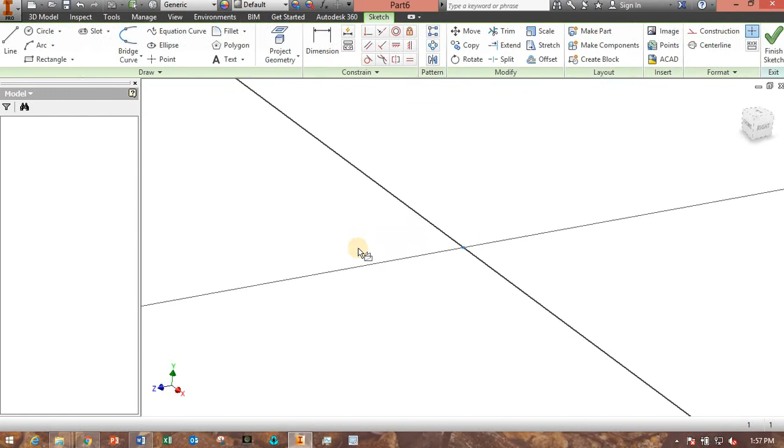So they cannot do this spoke because that spoke is not a straight extrusion. It's a curved spoke. So this is why we need to use sweep. All right. So let me show you how to do that. The first thing I'm going to start out with is drawing the hub. So let's start a new part. Make sure it's a millimeter part. And let's create a sketch on this base plane so that we can create the hub to be 80 millimeters.

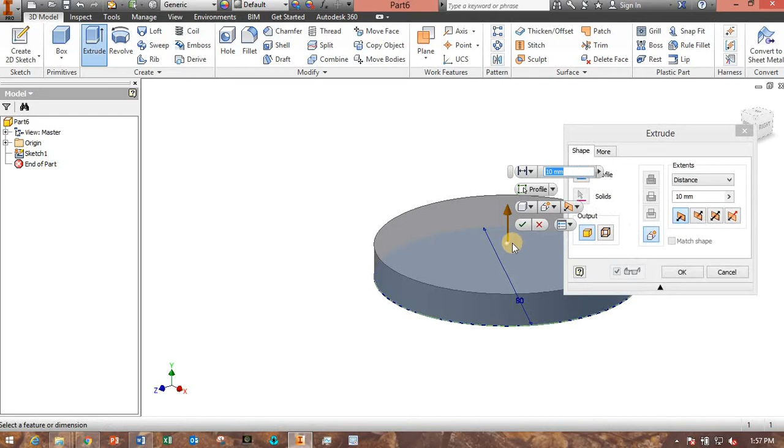Okay. Now I'm not going to draw the hole right now, and you should not either, and I'll show you why in a little bit here. So just start with the base circle here. So let's extrude that up a distance of 50. Okay. Before I go any further, it's a good practice to save it early on. This will be lab 4. Okay. Make sure you save your work early on. All right. So I have this.

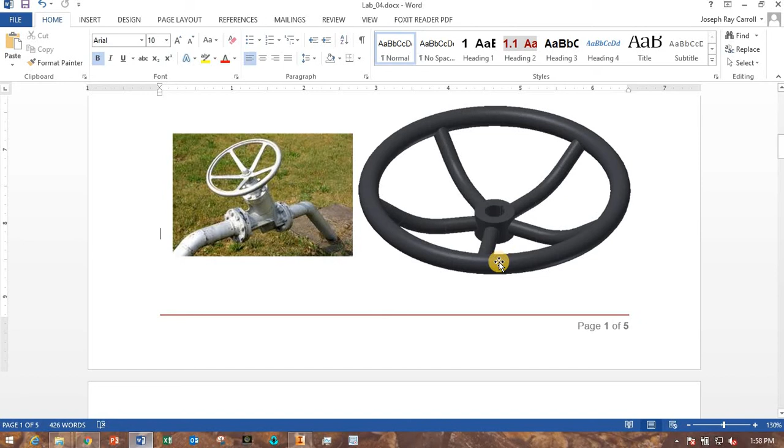Now, I told you I did not want you to at first make this hole here that's in the center of the hub. Now, to demonstrate why I don't want you to make it, I'm going to make it, and then I'll show you the problems that creates later on. So at this point, if you're following me, do not create this hole right now. Just watch me do it now, and then we'll create it later. Okay?

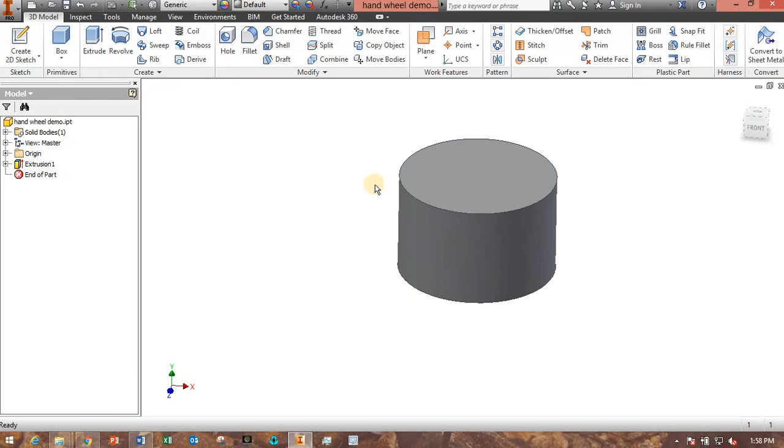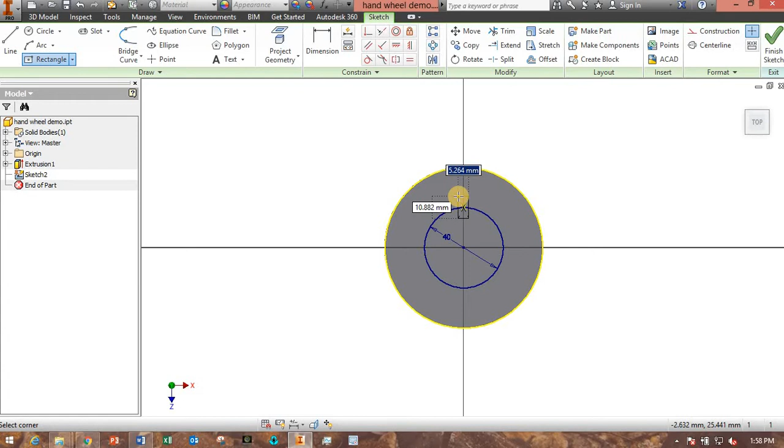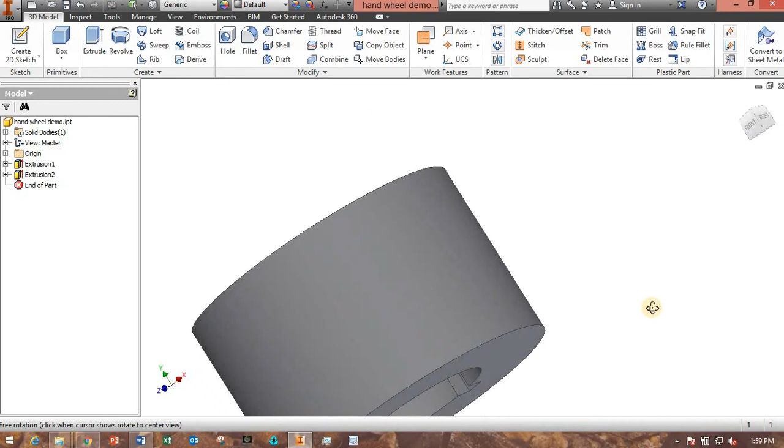Alright, so I would create a hole with a diameter of 40, and let's use the center point rectangle to make this keyway here. Alright. Okay, so if you did make the hole at first, this is what it would look like, and then I'll show you here in a second why we don't want that.

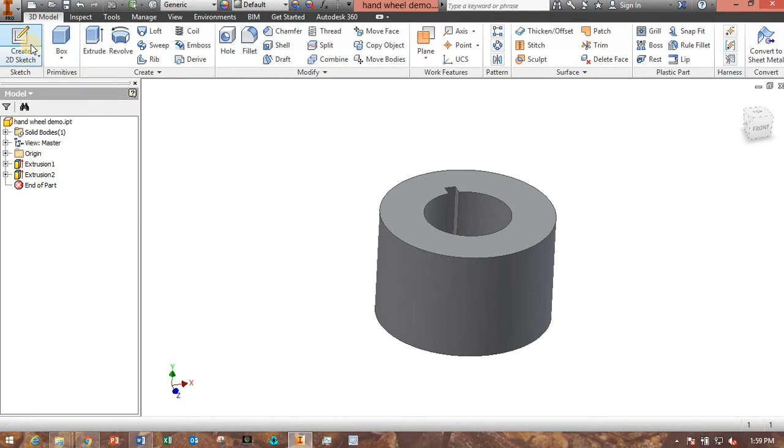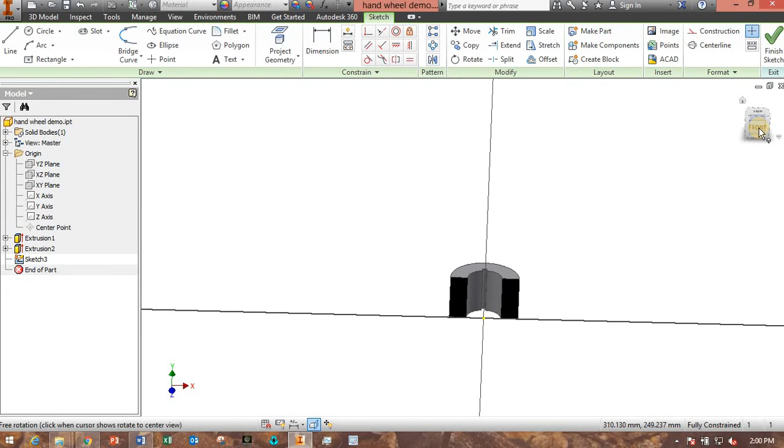Okay, so let's create a sketch. Make it on a plane like this. Okay, now I'm going to click on slice graphics here. So you can see what that does. It makes it so I'm just looking at the plane that I'm drawing on. Okay, alright, now I'm going to use what's called project geometry here, but before I do it, let me show you the reason why I want to do that.

So the height of this hub here is 50 millimeters, and the sweep path will start right in the middle of it. I could dimension the line to be 25 millimeters down from the top, but that would not capture my design intent. The design intent says that the sweep path will always start in the middle of this hub, so if it's 100 millimeter height here, then it should start a distance of 50 millimeters down from the top. So I'm going to create a line that goes from the bottom to the top, so I can start my sweep path in the middle of that line.

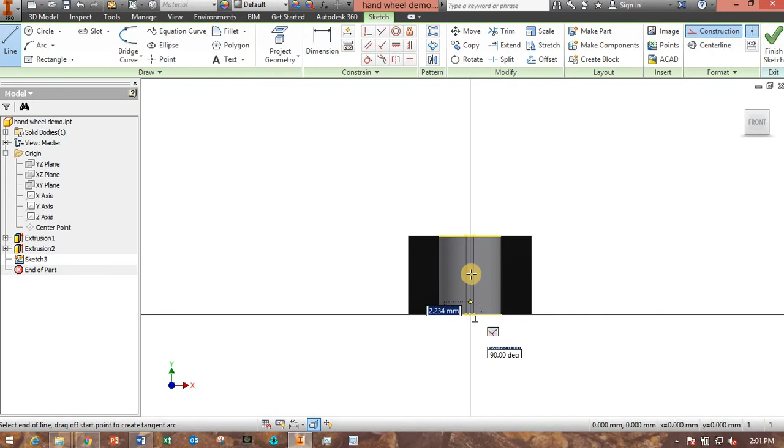Okay, so first I want to project geometry, and I'll show you what that does here. I'm going to project this line and this line into the geometry. Notice they turned yellow for me. Okay, now I'm going to create a construction line that starts here and goes up to this line here. Okay, so the important thing about that is now I have a line that is tied to the bottom and the top, so when I start my sweep path, I can start it at the midpoint of that line. So I know it's always in the middle.

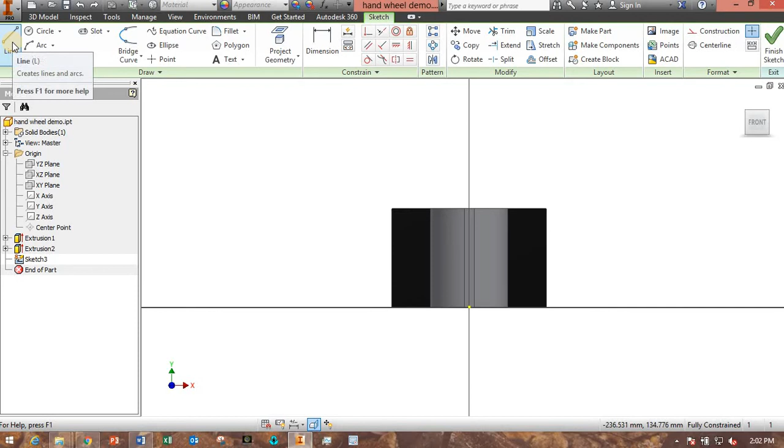Okay, now you say, well, why did you use project geometry? Let me back up here and show you why I had to do that. If I click on the line tool, let's make it a construction line. I would start here.

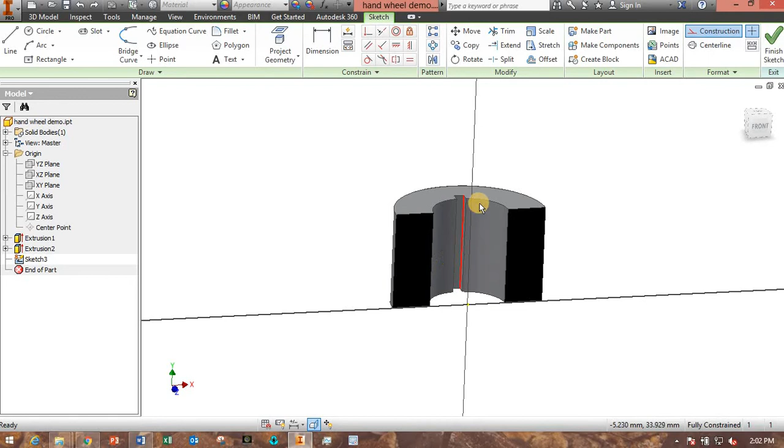Now if I drag up, I want it to snap at this edge here, but notice it's not snapping, meaning that yellow dot there that shows my cursor doesn't snap to this edge. It doesn't know where that edge is. Okay? And so in order for this sketch to know where that top edge is, I basically tell it, hey, go get this edge and bring it into the sketch.

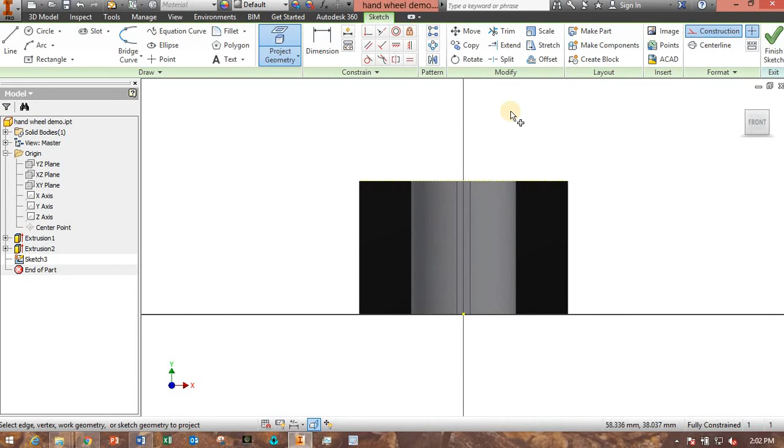Okay, so that's all project geometry does. Project geometry says, hey, let's take this geometry and let's project it or bring it into the sketch. And notice that yellow line that appeared. Now that that yellow line is there, watch the difference. Now when I click on this line, I go from here, notice it snaps green. The green means it's right on top of that edge. So that's why I needed to use project geometry.

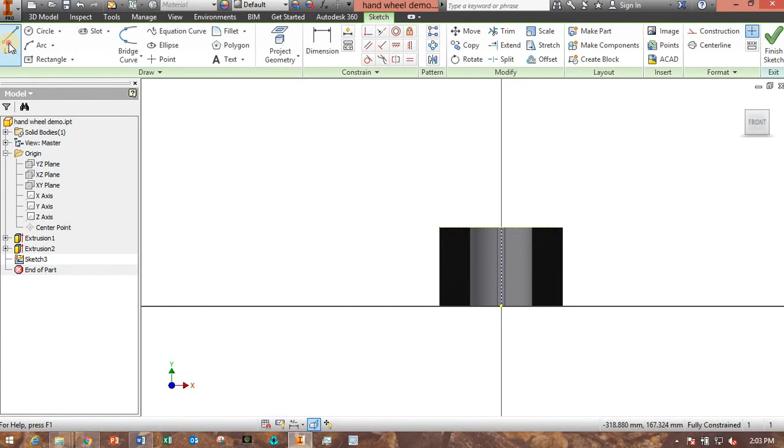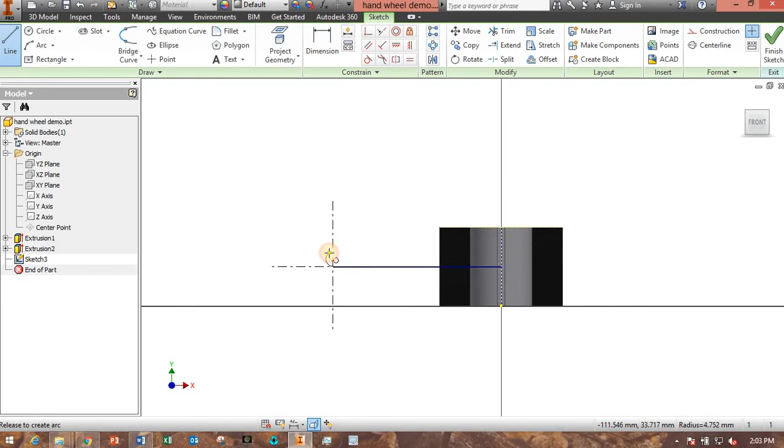Alright, so now let's draw the sweep profile. Let's start with a line and make sure it's on the midpoint here. Let's first come horizontal. Now I click and let go. Now with my cursor still on the end, I'm going to click and hold this time, and if I click and hold and drag, notice it's creating a curve. I'm still holding my mouse down, and notice the tangent constraint that has appeared here. The tangent constraint.

So now if I let go, there's a curve, and then I can continue out here. Notice this is not tangent. If I keep bringing it up, the tangent constraint will snap. There it is. And I can click again, and now click escape. So there is the sweep path right there.

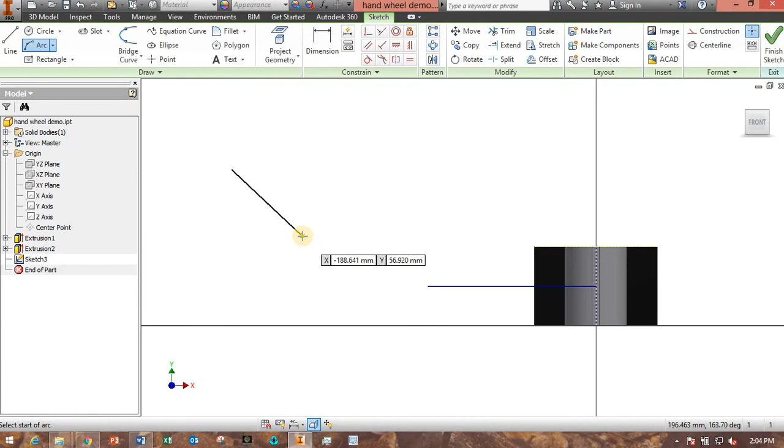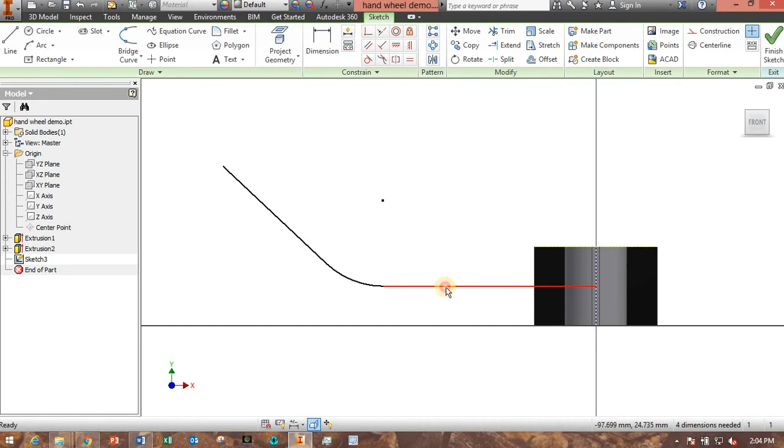Another way to do it, let's say you're not able to get this curved piece like this. Well, you just draw two lines, and then you can use an arc like this. With this arc, I can select the start, the end, and some midpoint. Now I'm going to do it not correct at first. There's an arc. Notice this is not tangent here. Well, I can fix that by using the tangent constraint, and I can do the same thing here. Alright, so there's a straight section, a curved section, and then a straight section.

So let's now go add your dimensions to this sweep path to define it. I'll leave you to do that. Here's the straight section from this tip to here.

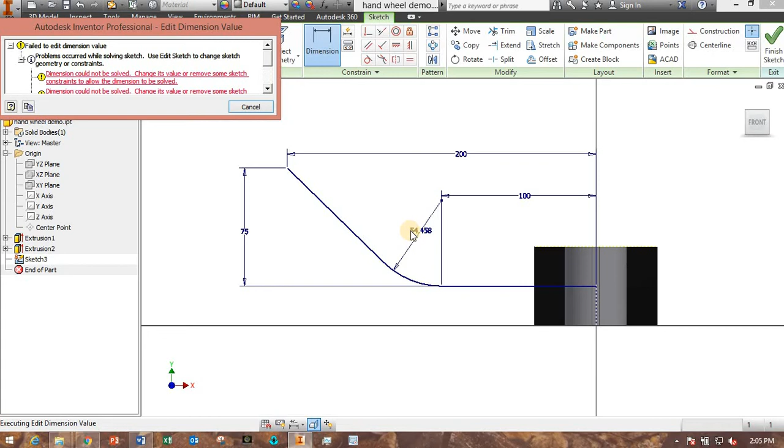Okay, obviously it didn't like something here. I tried to add in this radius dimension, and it didn't like this radius. Let's try to figure out why. Maybe I've added a dimension that conflicts with this. Let's delete this dimension. Wonder if I can drag this. Let's change this to be 150. That's no problem. I've got the 75, the 200. So notice that error came up; that means the sketch was over constrained.

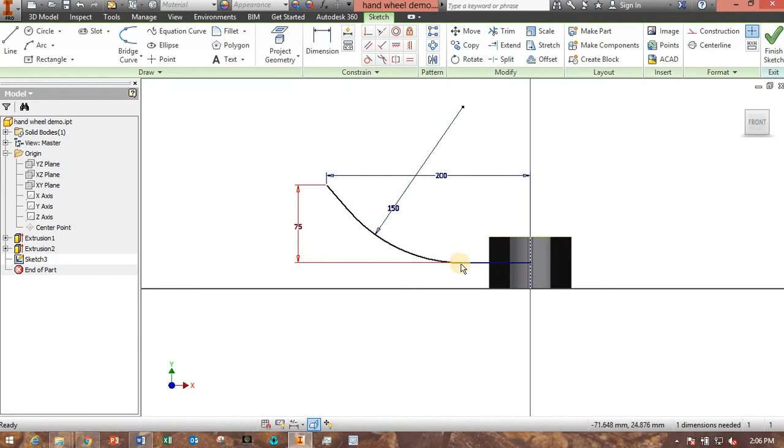Let's now try to add in this 100. Okay, it's not working. I see why it's not working, because I've defined this as 200. What if I make this 250? Okay, that's 250. Now let's try this. Okay, now that works. So notice I had the error there.

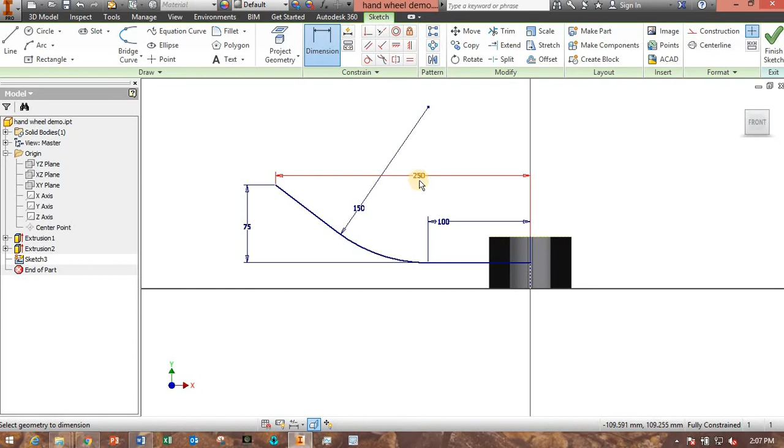That error: I had accidentally defined this 250 as 200, which was impossible for this to be 75, this to be 100, this to be 150. It was impossible for those three to be defined that way and this to be 200. So there we go, this is 250. So now we're okay there. All right, so let's finish that sketch.

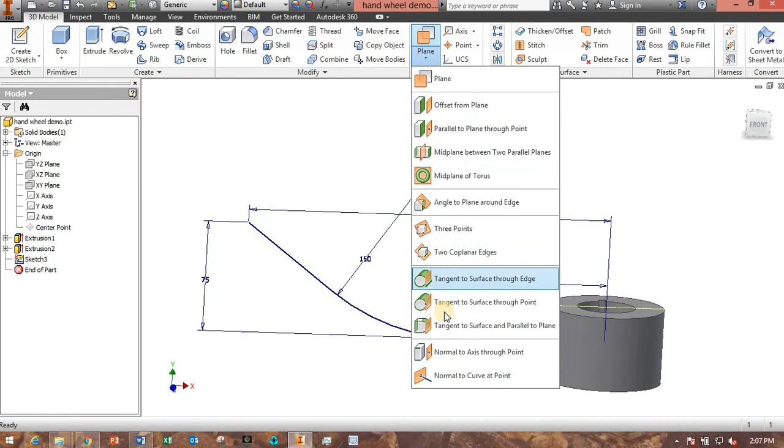So now I have the sweep path, and now I want to make the sweep profile. That profile is going to be perpendicular to this path. So let's create a plane that's perpendicular to this line that goes through this point. Let's go back to my work planes. The way to do that is down here. Select this axis and now select this point, and there's a work plane that's perpendicular to this line. Now I can start a sketch on this, and I can draw a circle of diameter 30.

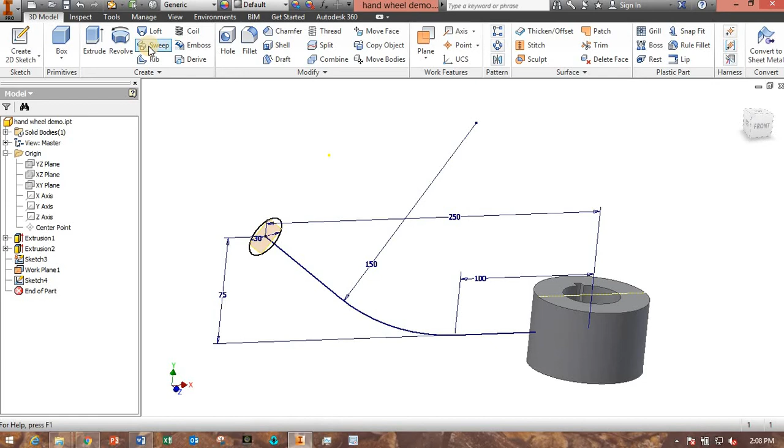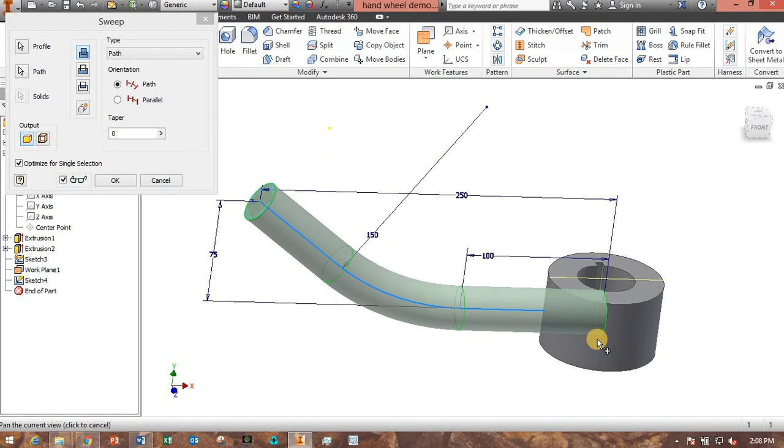And now here's what the sweep does. Here's my path, here's my profile. So here's sweep. It's automatically selected the profile. The profile is that circle. Now the path is this path. And notice what it does there. It sweeps that profile along that path. And now I click OK. And there's one.

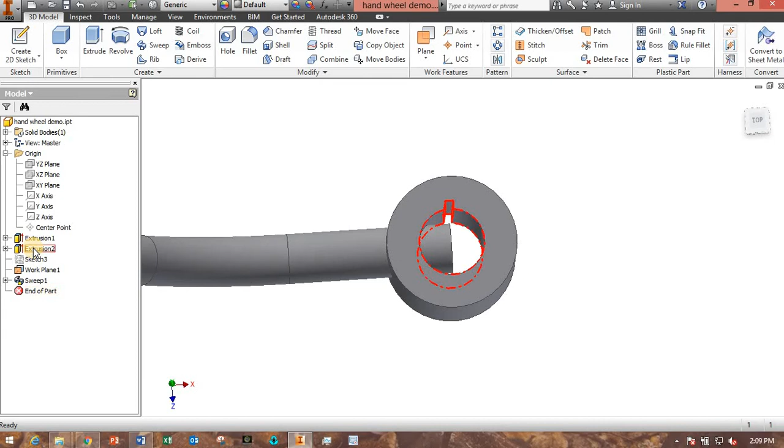Now remember, I said do not create the hole at the beginning. I'll show you why, because now if I look here, that's not good, right? The spoke goes into the hole right here. So this is why we don't want to create the hole at the beginning. If we create the hole at the very last step, then it would cut through this part of the spoke. So let's take away this hole that I've made. That was done with this extrusion, so I can right click and delete that, and now it's gone. Now there's one spoke.

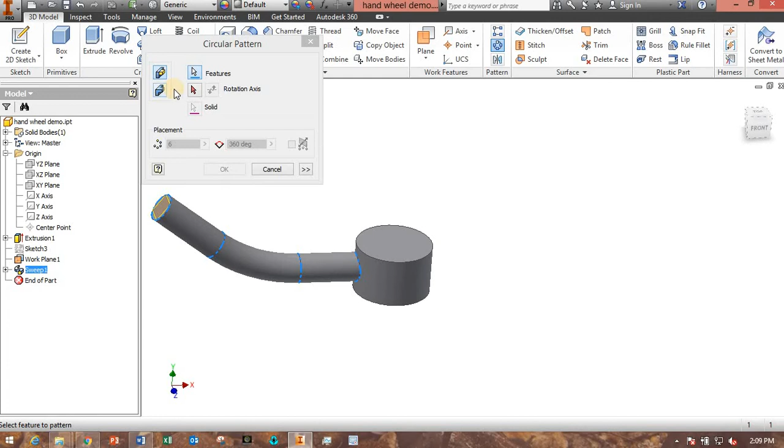To get the other four, we just need to pattern that. So let's do a circular pattern of that sweep, and let's use the rotation axis of this. And how many spokes are there?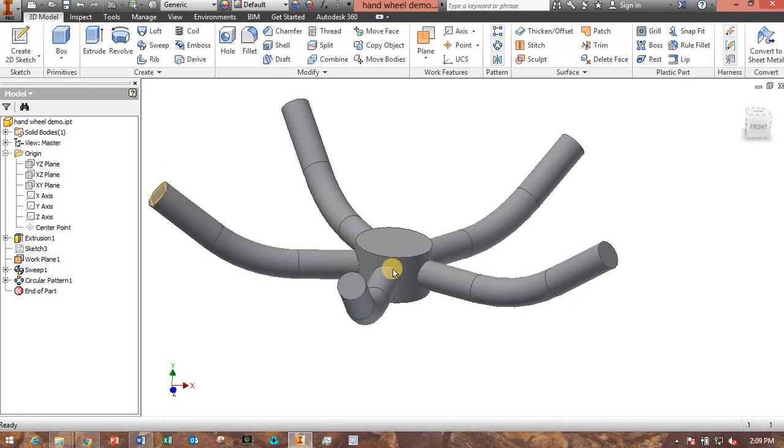There's 5. There you go. So there's 5 spokes. Now I need to get the hand wheel that connects the ends of all these spokes here. Okay. Well, that can be done with a revolution. So let me show you.

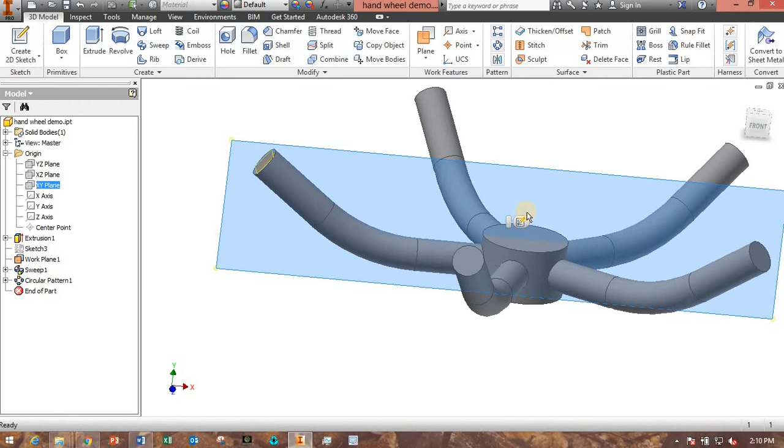Here, I want to create a sketch. Which plane is that? No, that's the bottom plane, not that plane. Okay, we want a plane like this. So if I create a sketch on this plane, and then I draw a circle here and revolve that circle, then I'll have the hand wheel. Simple enough. Now, watch this.

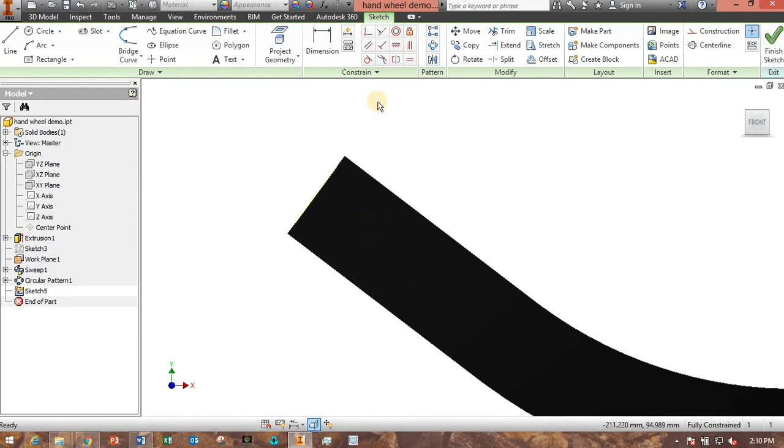Here, let's slice the graphics. Okay, so again, I'm only looking at the plane that I'm sketching on. Okay, if I click on circle and I want to try to draw a circle that is right here on this edge, is it snapping? No, it's not snapping. My yellow cursor is not turning green.

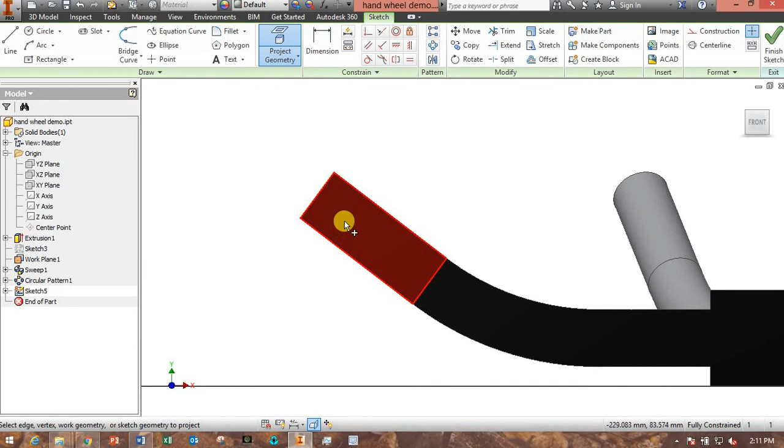Okay, so this is where we would want to use project geometry, meaning I would bring the geometry of the spoke into the sketch so that then the spoke is always connected to the sketch. Okay, now, so if I was doing it correctly, I would click on project geometry and click the spoke here, and now it snaps green, you see that, and I can draw this circle.

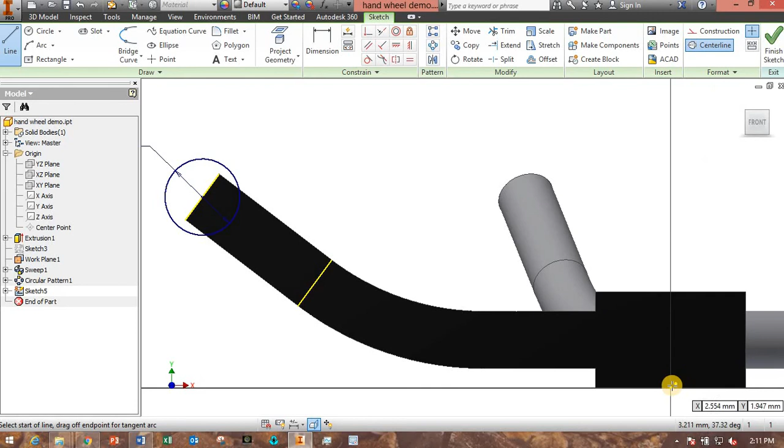Okay, so again, you can add a dimension to that, dimension of 40. Okay, now I'm going to revolve this around the center, so let's make a center line. Now let's do a revolution. There it is. Okay, now I could go back and draw the hole here. But let me show you why it was really important to connect them.

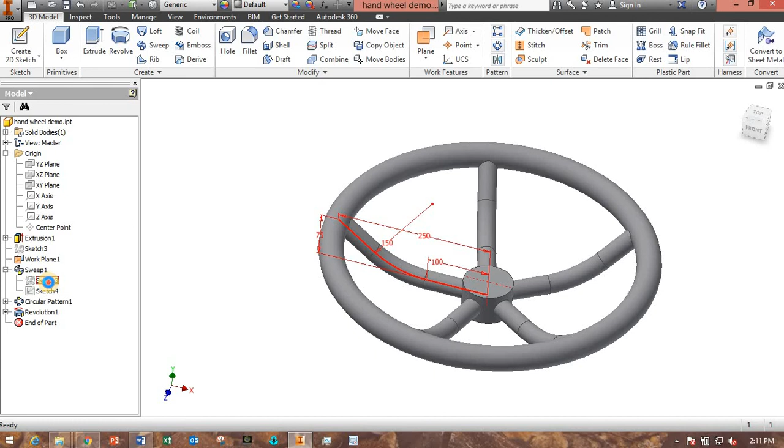Okay, let's say if I have a design change in the part and I want to make this hand wheel a larger diameter. Well, I would do that by changing this sketch here where I defined the sweep profile. Look here, what if I change this? Let's make it 300. Okay. Well, look what happens. The wheel still stays attached. If I did not use project geometry, the wheel would not have stayed attached.

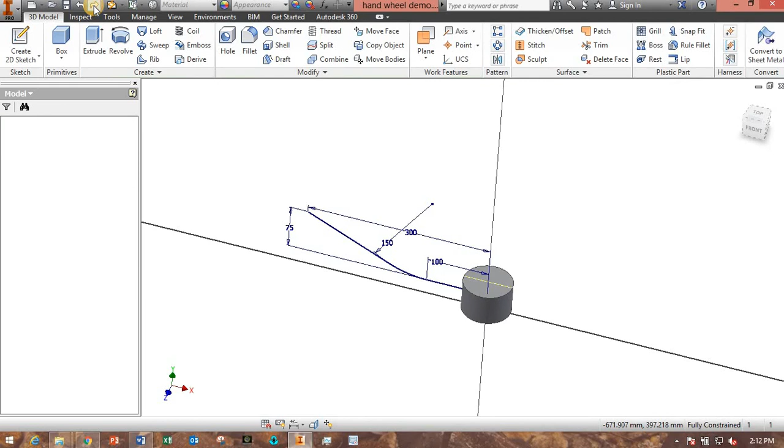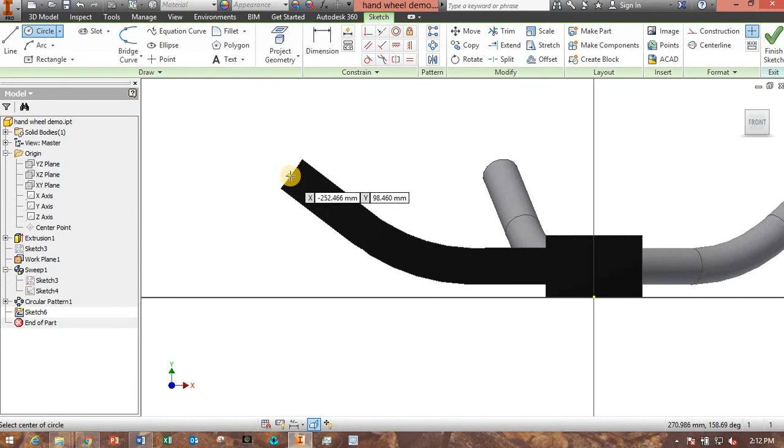So let me show you that. So let's undo here. All right. Let's delete this revolution. Okay. So let's say I sketched on this plane. So this is slice the graphics just like I was doing before, and I do not use project geometry. All I do is I say, oh, let's just draw it right there. That looks close, right? Let's make that a dimension of 40.

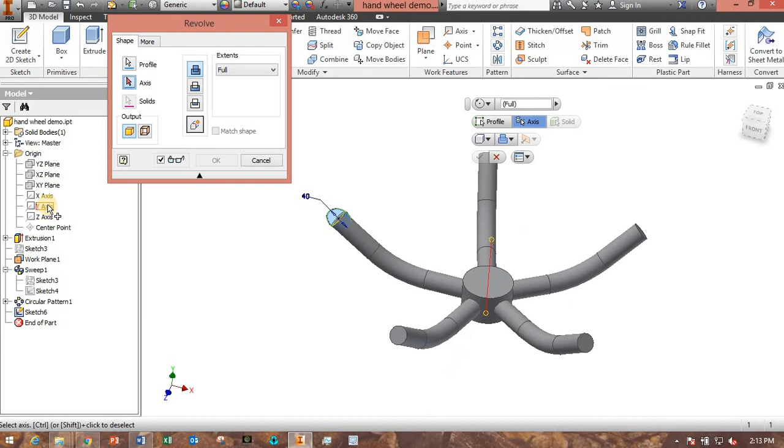Okay, let's drag this to be right there. You say, okay, that's nice. It looks on the end. I can finish this sketch. I can revolve this profile around. I forgot to make an axis here. That's okay. Notice, look here, I didn't make an axis, but I can go select an axis here. Which axis here is vertical? There you go, that axis. Okay, so there it is.

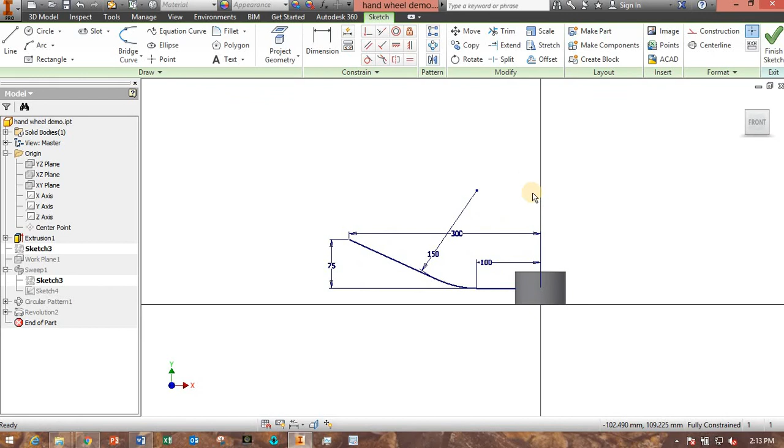You say, oh, that looks fine. What's wrong with that? Well, here's what's wrong with that. If I have a design change and I want to make the wheel bigger, I can edit this. Now let's make this 300. Finish the sketch. Oh well, that only changed the spoke. The spoke was not connected to the wheel, so the wheel stayed that same diameter. Okay, and that's not good.

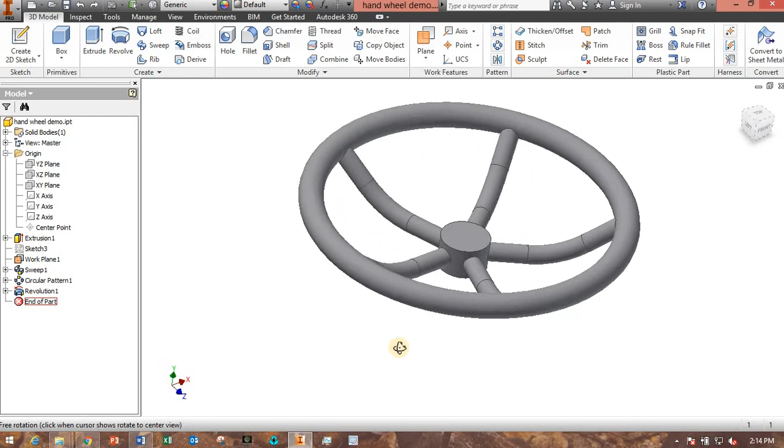So that's why we need to use project geometry so that we link these spokes with this handle here. Okay. So I can back up there. Okay, there we are. So that's why project geometry is extremely important. Now the last thing, if I make the hole now here at the end, well, then it will cut through the spokes and I won't have a problem here anymore.

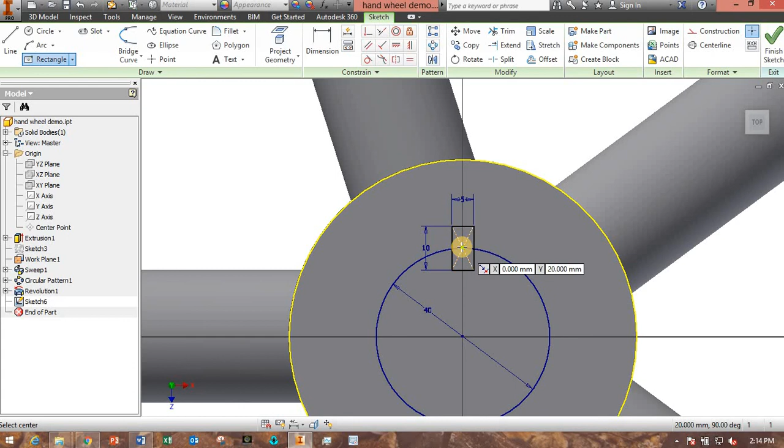Okay, so there's that. Notice I'm using a center rectangle with a width of 5. Now, why do I not make this 5? I want to make this 10 actually, because now the distance from here to here would be 5. Right? That distance would be 5. Okay. Let's finish that sketch. And now extrude this rectangle as a cut. And let's make it go through everything.

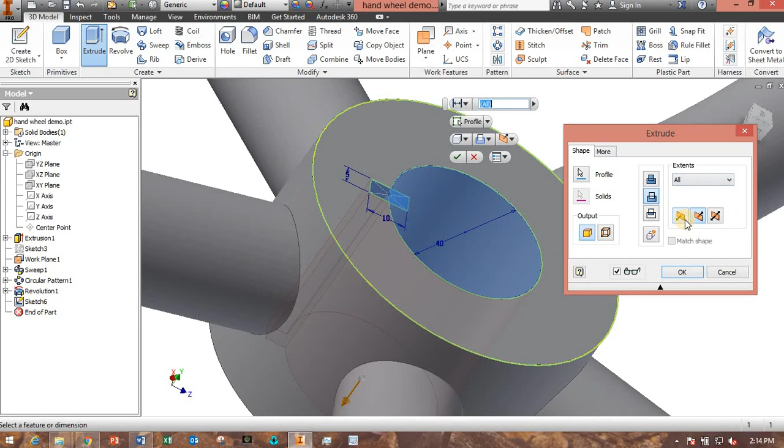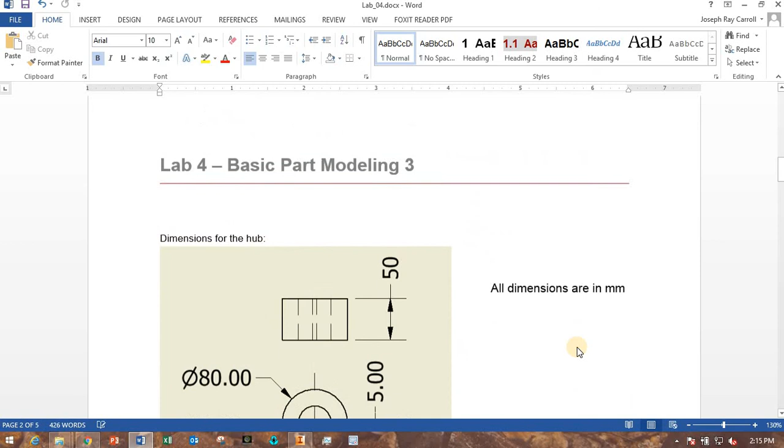There it is. Now I need to fill in my iProperties. What was the material? I think the material was cast iron here. Yeah, it's a cast iron hand wheel. So let's go find cast iron. There it is. Makes it 21.144 kilograms. Notice the color changed to where it looks like a cast iron type of a color. So there's that hand wheel.

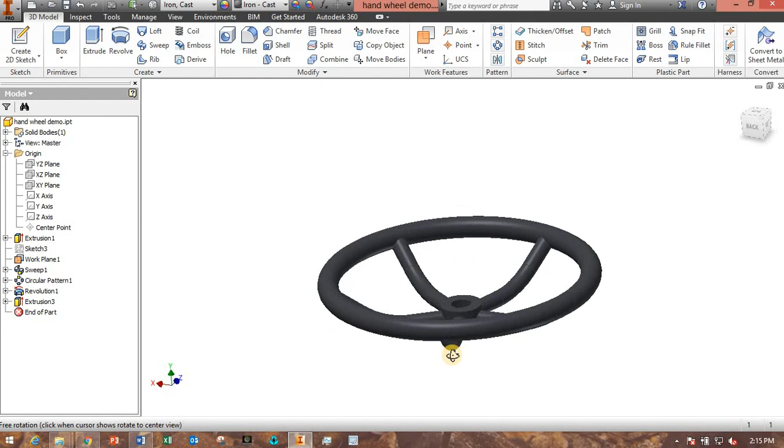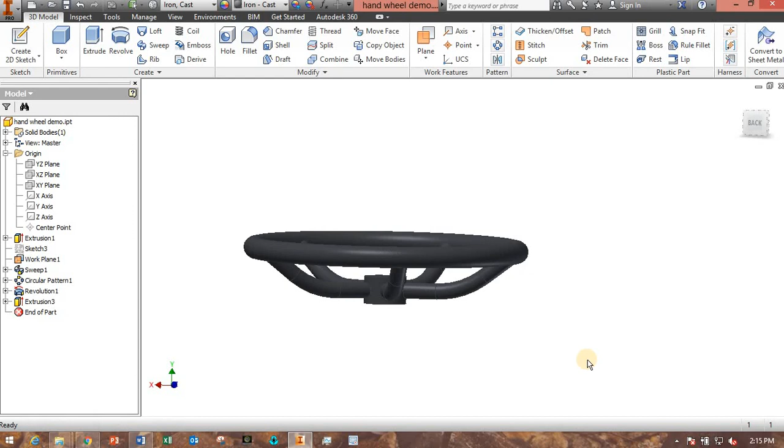So hopefully you've seen why project geometry is important, especially when you want to connect different features in a part, so that when you make design changes later on, you don't have lots of trouble making those design changes. So there's that part. Now the other parts in this lab, I hope you can apply the things you've learned here in order to solve those problems.